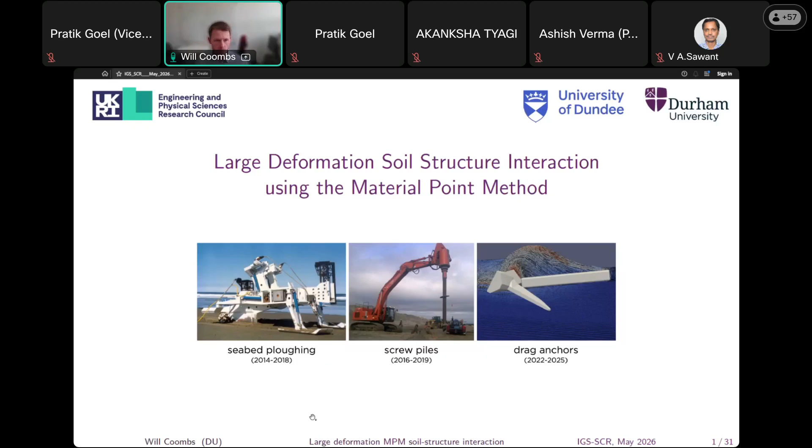Now, over these sort of 12 years, what that's allowed us to do is to be able to model quite interesting and challenging problems that involve a lot of different types of nonlinearity. So the sorts of things we now regularly simulate look like this - dragging of a shipping anchor into the seabed and modeling the full soil structure interaction process, large deformations, contact and friction, plasticity, etc.

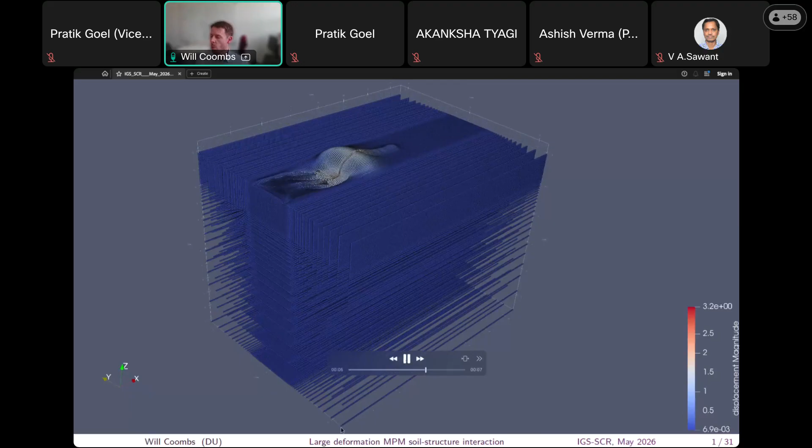But that's required us to really get into the fundamental details of the method and resolve a number of issues that were present in the method when we started looking at it. Initially, we thought we would be able to quickly pick up the method and just run simulations like this, and that turned out not to quite be the case. What I want to do today is mainly spend time talking about the fundamentals of the method and how you can resolve those difficulties rather than just showing lots of interesting and pretty videos of the results.

Oh, apologies, we'll skip back to the beginning.

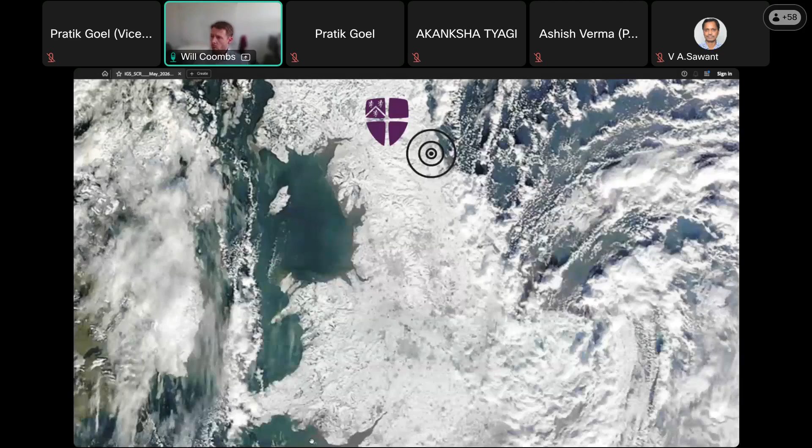Hopefully, there we are. Okay, so a little bit of an overview of the presentation. What I'll do first of all is just introduce the material point method. I'll then cover two particular issues that I think are really important to understand and to be able to overcome if you want to run realistic large simulations using the method. I'll talk a little bit about how we deal with soil structure interaction in the method, and then just show some numerical examples and conclude with a few observations on where things are.

Now, a lot of the basic developments that we've done in the method have been performed in a piece of open source software called Ample. This is something that I published alongside Professor Augarde about 6 years ago. This particular code is written in MATLAB, and it was designed to be as easy as possible to use by research students who wanted to start trying out things in the material point method.

We're also just about to release a Python version. So for those of you that are more familiar or happy with Python, that will be coming out this year as well. And so if you are interested in getting to grips with the method, this is, in my opinion, a reasonable place to start. A lot of the things I'm showing you can reproduce in this Ample software environment.

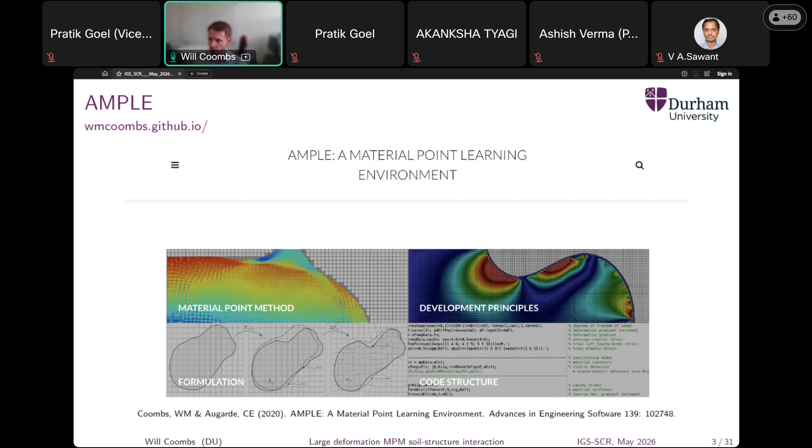Now let's get into the basics of the method. So how does the material point method actually work? I assume that most of you are familiar with the finite element method as the kind of default stress analysis tool that we use in engineering. The material point method shares a lot of similar aspects to the finite element method, and actually, the equations that we assemble and solve are essentially the same as you would do in a finite element method. But there are a couple of fundamental differences that means it has its own unique capabilities and challenges as a numerical tool.

So here, if we start off, the way that we represent our physical material in the material point method is through a collection of points, or material points, shown by the dark gray circles on this particular image. This is trying to represent a physical body that can deform, and that body's extent is shown by the gray shaded area, with the boundary as the black line.

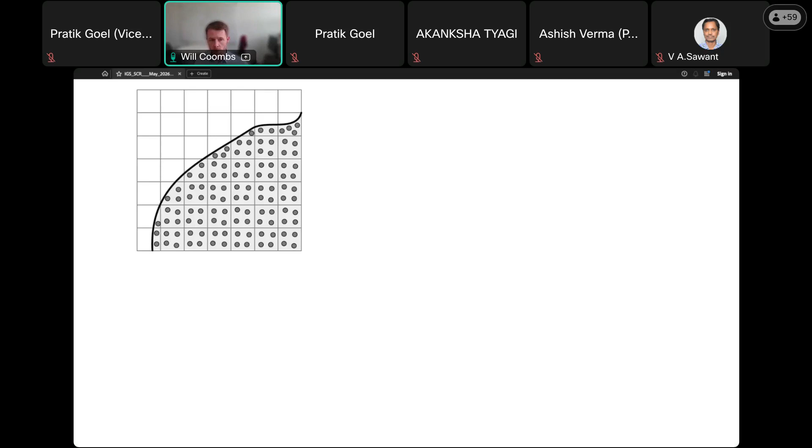Now, we also need a background mesh in the material point method, and this mesh is effectively a finite element grid. It's on this grid that we assemble and solve our governing equations. That can be the sorts of equations used for stress analysis, or this could be coupled soil water, or whatever set of equations - it could be thermal. We assemble them in the same way that we would on a finite element problem.

So what we would do is take the information we have about our material held at these material points, and map that information, such as the mass, the stiffness, the stresses, onto the background grid. And we use that information to assemble our governing equations.

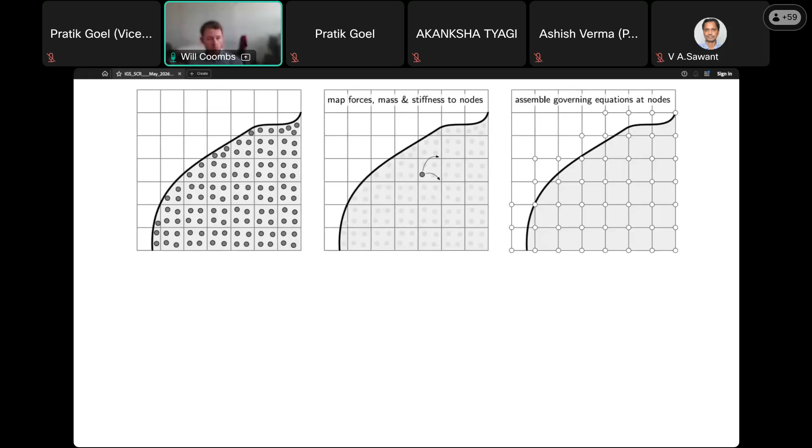We assemble those on the discrete locations in the background grid, like you would do in a finite element problem, and then we solve those governing equations. That leads to deformation of our nodes on our background grid and deformation of our mesh, and it also leads to deformation of the material we're representing.

Now what we then do is take that information we solved on the grid and map it back to our material points. We map and update the positions, the stress history, and any constitutive variables we're using, depending on the material model at those points.

And then the final step is we reset or completely replace the background grid, and then we just repeat this process. It's this final step of resetting or replacing the background grid which is the key thing that distinguishes it from the finite element method.

It's the key thing that allows us to model very, very large deformation problems with this numerical method, without getting into the issues that occur in the finite element method, such as mesh entanglement and mesh distortion, which would typically require you to remesh in your finite element program and then map information between meshes, such as material history.

The really nice thing about the material point method, particularly for geotechnical problems where we typically use relatively complicated constitutive models with a strong stress history, is that information is naturally maintained at the points as they deform through the mesh. However, there are issues caused by the fact we allow points to move through the mesh, and that's what I'm going to talk about a lot.

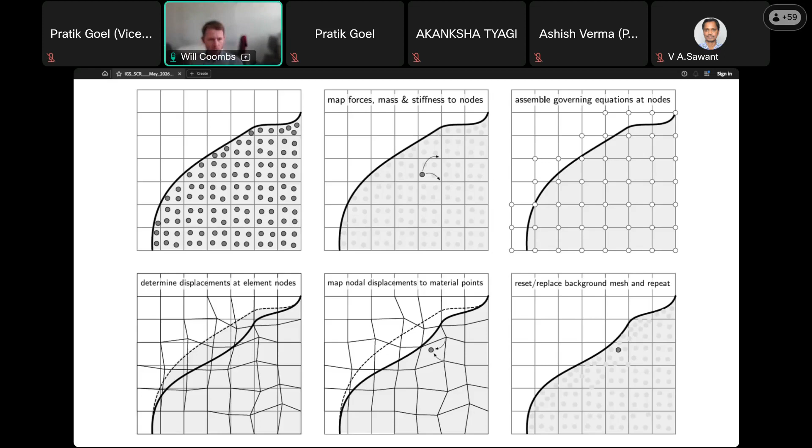So one way to describe the material point method is just the finite element method, where we allow the integration points, or the Gauss points, to move. That's essentially what we're doing.

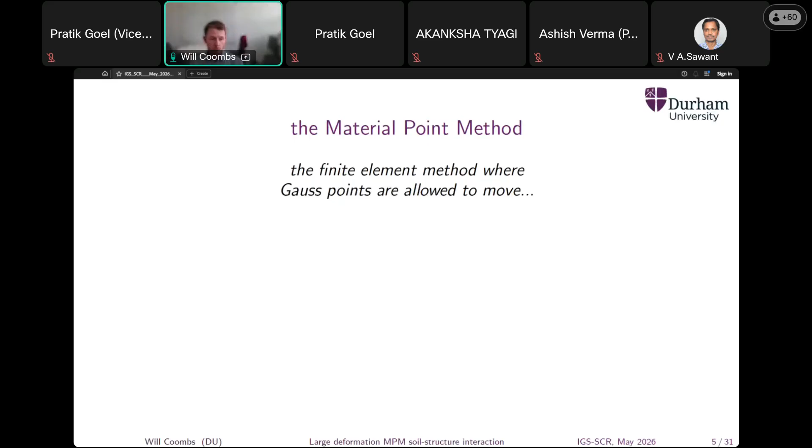However, that does introduce a number of issues, because there's a reason we carefully tie the finite element method integration points, or Gauss points, back to their parent elements. So I'm going to talk about two issues.

Now, the most widely known issue in the material point method is something called the cell crossing instability. This is what we would maybe call in the UK the elephant in the room for material point methods, and it's something you have to resolve if you're going to have any chance of doing reasonable simulations in the material point method.

But the other issue I want to talk about, which is less widely talked about, is this issue of small cuts, a small cut instability that is really severe in the material point method, which again we must deal with. Otherwise we're not going to have robust and accurate simulations, particularly not robust simulations.

So let's start with the cell crossing instability, and as I say, this is probably the most widely known issue in the material point method. What I'm going to do is take a step back and think about a very simple problem, a one-dimensional problem, shown at the bottom here.

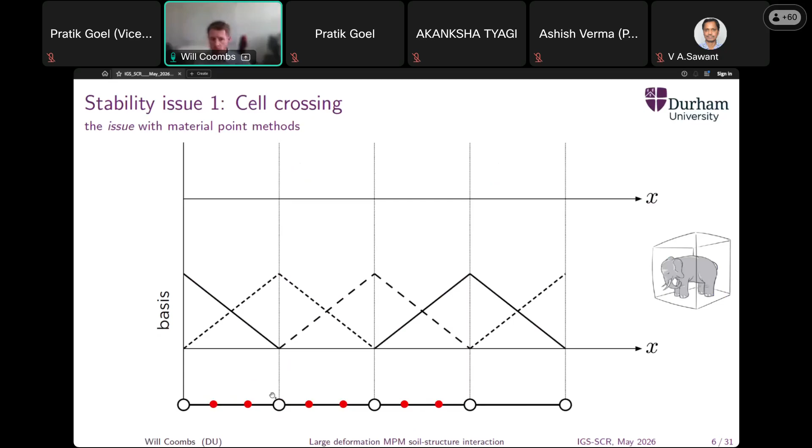We have a collection of material points representing a one-dimensional bar, for example — those are the red dots. We have a background grid, here just a grid of line elements, and the nodes of that background grid are shown by the white circles. We're going to apply a force to the end of that bar. Now we'll just use linear finite elements, so we can plot the shape functions, or basis functions, of those elements — you're perhaps familiar with these hat functions for linear finite elements.

As I said, we're going to apply a force at the end of this bar. Now also, when solving finite element type problems, we need the derivatives of these basis functions as well, and those are shown above. Because we have linear basis functions, their derivatives are going to be piecewise constant over each element.

So we apply some load at the end of this bar, and what we're going to do is consider what's going on at this grid node here, shown by this grey circle. We're only interested in the shape functions associated with that final node.

So they'll go to 1 at that node and 0 at the other nodes, and the derivatives of those basis functions as well. Now, in order to find equilibrium, what we do in finite element methods is have balance between the internal forces generated by the stress in our material with the externally applied loads. And the way we do that is we map information from the stress in our material to our grid node locations using the derivatives of the basis function and the volume associated with the particular point.

Same thing as in finite elements. In finite elements, we have a Jacobian and weighting information typically associated with our Gauss points, but that's just representing the physical volume associated with that particular point. So this has got to be balanced with the external forces.

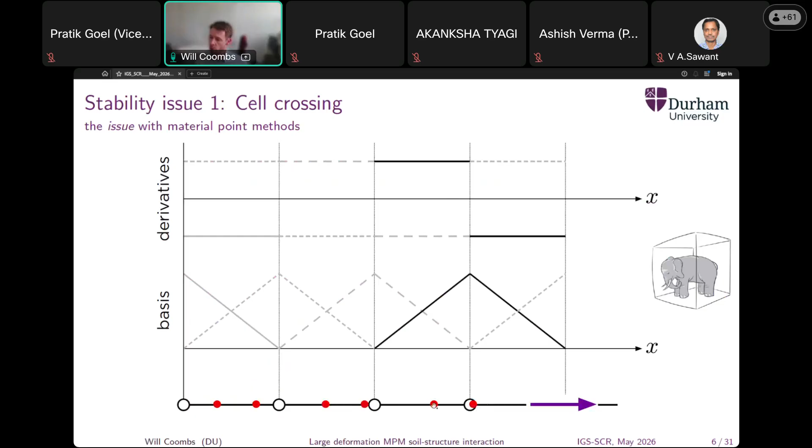Fine, we reach that balance and we have some deformation, but at some point that material point will cross from the element it was in originally into a new element. And when that happens, we get a sudden change in sign of our basis function derivatives. So that's this red part in here.

This is the spatial derivatives of our basis functions. And what this is going to do is cause a sudden change in sign of this internal force contribution from that material point. And it's this sudden change that causes the cell crossing instability, because now that force is no longer going to be in equilibrium with external loads, and we're going to have oscillations in our material deformation and stresses in order to find a new balance.

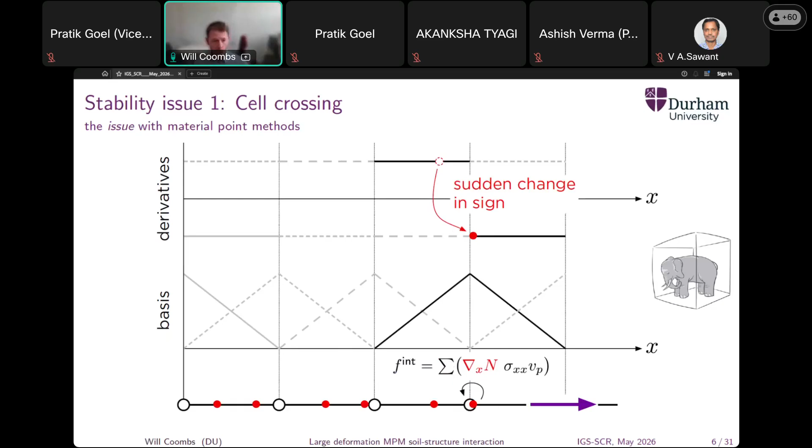And this kills accuracy in the standard material point method. So let's consider a really simple problem, probably one of the most basic benchmark problems we would do in the material point method. This is the elastic compaction of a column under self-weight.

So here, this is the problem that's been set up. We've got a column of material. The material points are shown by these white circles. We've got a background grid. We've got roller conditions on either side of the base, so this thing can only compress in one direction, only compress vertically, and we load it under gravity.

Now, this is a very simple problem where we have an analytical solution in terms of the stress based on initial vertical position in the column. And if you run this with the standard material point method compared to the analytical solution, you'll see something like this in terms of the stress response.

And you think, well, okay, it's a finite element-based method, so maybe I just need to refine my grid. So you refine your grid, and this is what happens. You have more points, more elements, and you just see more and more noise. That's because you're getting more and more of these cell crossing instabilities, which is just polluting your solution and completely destroying the validity of this very, very simple problem.

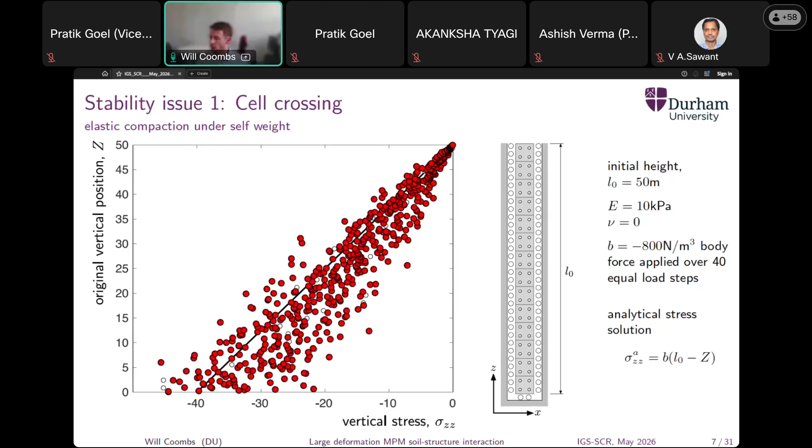Now, this was recognized a long time ago, and I'd say it's the major issue with the material point method. But there are lots of different ways this can be mitigated, and I'm just going to talk about the first way that this was really solved, and actually is the method we tend to use because it's, in our experience, one of the most robust and easy to use approaches to resolve this issue.

Now, this cell crossing instability really comes because we have a sudden change. As a material point moves from one element to the other, it's a big change in that contribution to the internal force within our system, and creates these large oscillations.

So back more than 20 years ago, Bardenhagen and Kober suggested a change where instead of having all the information about a material point at a discrete location, they said that what we're going to do is associate a domain, a certain area, with each of these points. And when it comes to things like the basis functions and their derivatives, we're going to average them over that area - we'll do a convolution of the basis functions over that area.

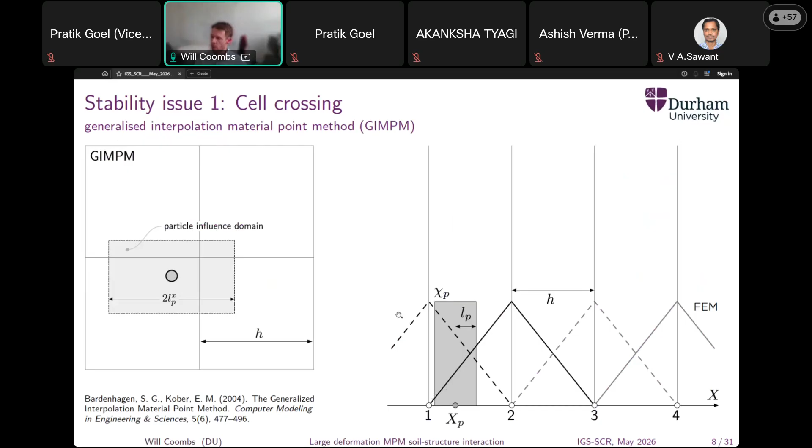So the consequence of this is basically what we do if we look at a one-dimensional plot of this. Here's our material point, and here's the area or length associated with that material point. These are our finite element basis functions, these hat functions. What we're going to do is integrate over that domain and average the basis functions, and that changes the basis functions we use from these finite element ones into something that looks like this, with a smooth transition between adjacent elements.

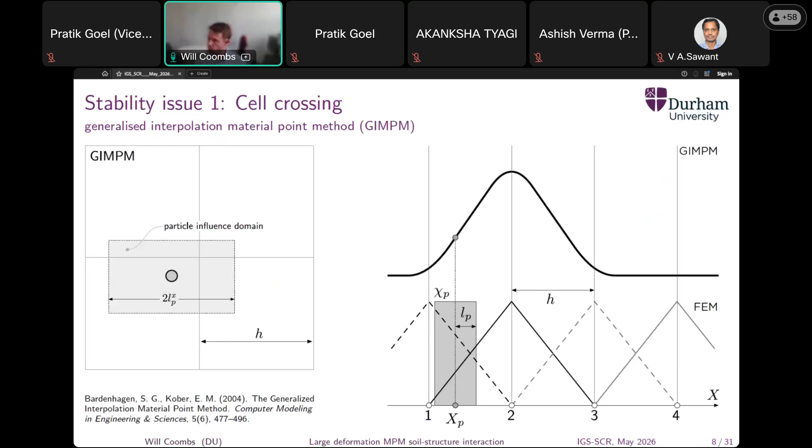So what that does, if we rerun this column problem with a relatively minor change, is that if we look at how our error reduces as we refine our problem, we suddenly now see convergence in our solution, because we've reduced these sudden instabilities in the method and smoothed out the solution by allowing a gradual transfer of information between elements rather than a sudden change.

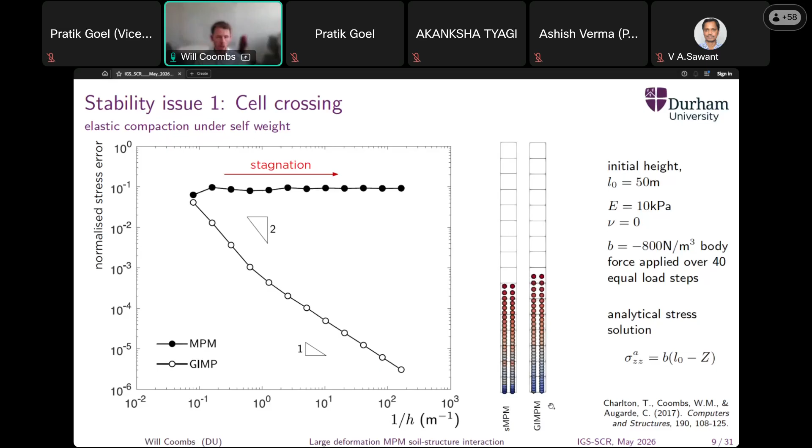And it's not just the stress solution that improves, which we can see here with the normalized stress error going down as we refine our background mesh and material points, but also the amount of deformation we're getting is different. This is the generalized interpolation material point method, or GIMP approach, versus the standard material point method. You can visibly see the stress oscillations in the standard method, whereas in GIMP these have basically completely disappeared.

So that's one of the issues, which I said was solved a long time ago, and this really transformed the accuracy of the method. There are lots of other ways you can deal with this - a very common approach is to use basis functions that have higher order continuity, such as B-splines, instead of standard linear finite element shape functions. That's also very successful at dealing with this cell crossing instability, and there are other approaches that have been developed over the years.

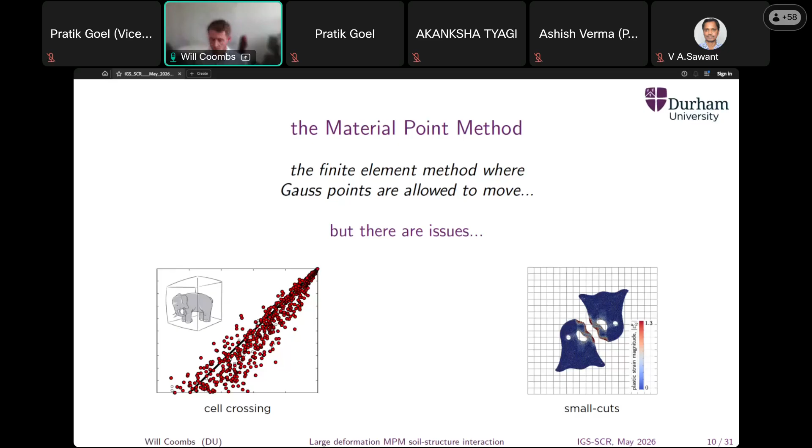Now, one of the other issues with the method that is not talked about very widely is this issue of small cuts. That's what I want to talk about next - what this is and how we can resolve this particular issue.

Now, for a long time, when we're using the material point method, what we would find is we would run a simulation and it would run with no problems. Then we would make a small change to the material properties, geometry, or loading of that problem and try to rerun it, and it would fail - it would fail at some point through the simulation. We couldn't really work out why. We would change the properties again and it might run, change it again slightly and it wouldn't run. So really, unstable behavior and uncertainty when you set off a simulation about whether it's actually going to complete or not - and that is a nightmare in terms of trying to use this method to solve any practical engineering problems.

Particularly as it was very difficult to predict how to avoid this in the first place. It didn't seem to be helped by having a finer background grid. It didn't seem to be helped by having more material points. It almost seemed completely random.

And what we then did is we started to look into more details about why these simulations were failing. Here what I'll show in a moment is just a video of a very simple problem - this is a two-dimensional analysis of an elastoplastic block under gravity, and basically what we see is this block slumping and collapsing. It's a von Mises type material.

Associated flow, very simple constitutive model here. What I'll do on the video is show the material point deformation, colored according to the shear stresses. You'll also see vectors of the displacement calculated on the background grid at each step through the simulation. And what we see is something a little bit like this.

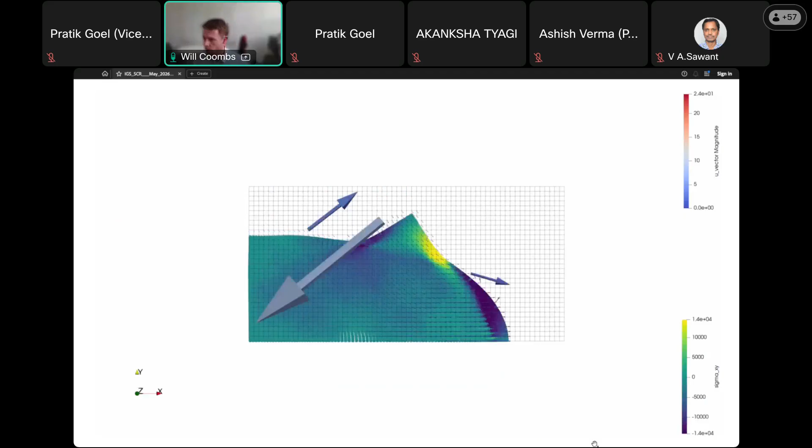So it runs, it collapses, but let's run that again. What you see at certain points, quite often through the simulation, are these very, very large values of displacement on your background grid. Now, I have not scaled at all the displacement vectors here. These are the true magnitudes of the displacements being predicted on the background grid.

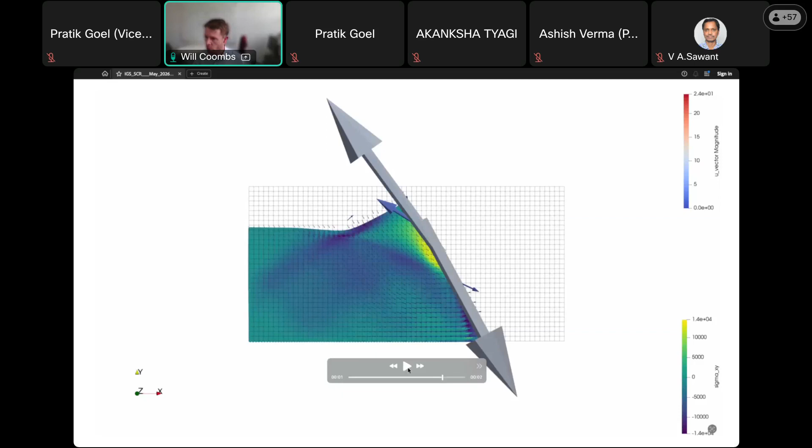You can see that some of them look entirely reasonable, quite small, so maybe tricky to see in terms of how the material is deforming. But others are completely spurious. You would not expect your material to be deforming upwards under this gravitational loading, and others are just huge, like this final one here — a massive displacement being predicted on the grid, not at the material points, but on the grid. But bear in mind, we use this grid information to then map back to the points to get our overall solution.

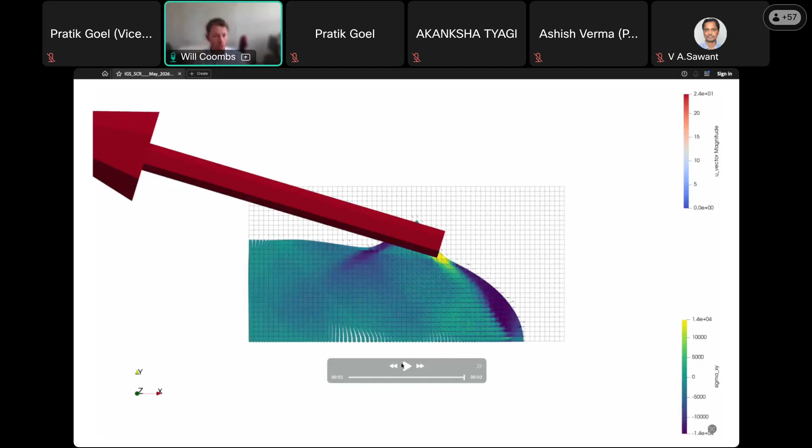It's these large displacements, and they typically, if we watch again, occur at the boundary of our problem. If you look where they're starting from, those arrows are causing these simulations to fail. Because what can happen is those very large values of displacement can then be mapped to the material points. They can then displace sometimes in a very unusual way, and that can cause the whole simulation to break down and fail.

So how do we get around this? Well, first of all, we were trying to really understand the issue in the first place. So we set up, again, a very simple benchmark type problem to understand what was going on.

This is a two-dimensional problem where we have a block of material. We constrain the base of that material by a roller condition, and then we pin one point so that we actually have a valid system to solve. And what we did was just move that material through the background grid. We're not actually solving a problem, we're just translating this material.

Then we investigated things like, what does the stiffness matrix look like that we're solving? What does the mass matrix look like, to try to understand why we're seeing these instabilities close to the boundary of the problem we were solving? So what do we see? The amount we're displacing is this value A, and the grid spacing is this value H. That's pretty consistent across all of the diagrams in this presentation. So what do we see?

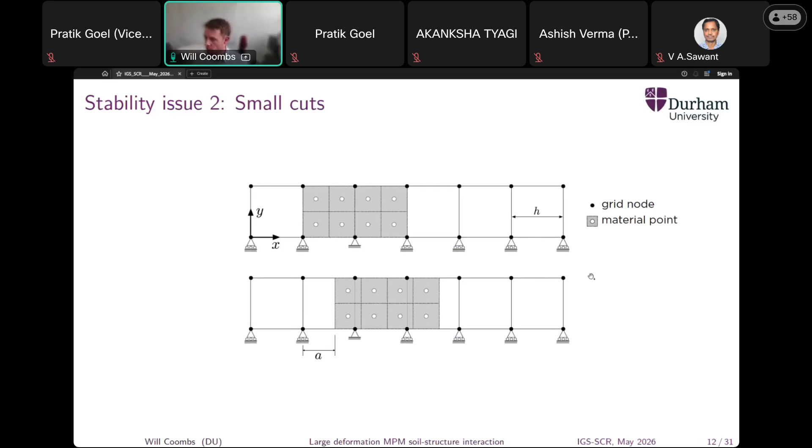For the stiffness matrix, we plotted something called the condition number. Many of you may be familiar with conditioning of linear systems, but if not, the condition number of a matrix is a measure of the ratio of the largest to smallest eigenvalues of your matrix, or some measure of the spread of the magnitude of the numbers within that matrix. Large numbers are very problematic because you start to run into issues of accuracy when you solve your linear system. The stiffness matrix is used to solve for displacements of our problem, and if you have a very large condition number, you basically run into problems of accuracy in your solver.

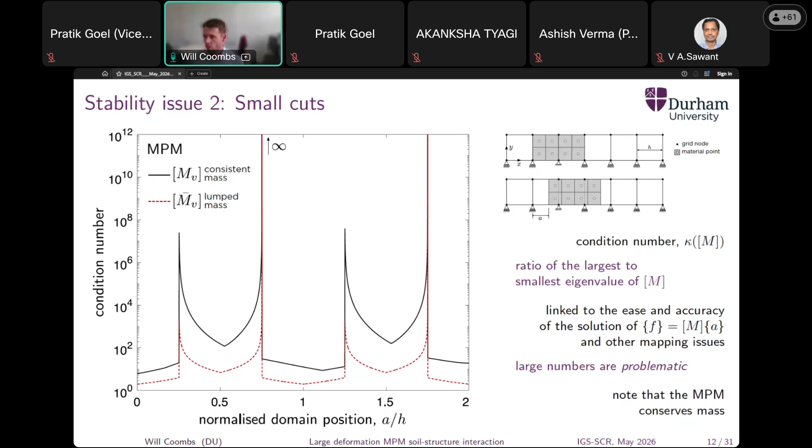Now, the consequence of that, particularly for explicit analysis, is it really impacts something called the CFL number. The CFL number is widely used across numerical analysis, particularly in explicit methods, and it's basically a measure of how small a time step you need to take through your simulation in order to remain stable. It's not strictly applicable to the methods we use because we tend to solve things using implicit methods, but it still provides a guide on how small a step you can take.

Now, we weren't the first to realize this was a problem. I think we were one of the first to resolve this generally for the material point method. This was actually mentioned by Sulsky, one of the originators of the material point method, way back in 1995, so 30 years ago. They proposed an approach called modified update stress last, which works for explicit methods to a degree. There have been other approaches, like redistributing these very small entries to other parts of the system, which can be done with explicit approaches. There's also been some ideas of introducing a very soft stiffness to the background grid for implicit methods, but in my experience this doesn't really work.

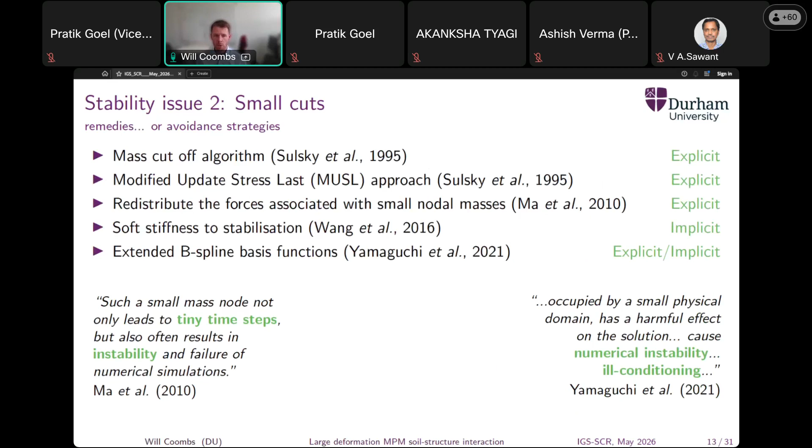This has been dealt with quite effectively for B-spline basis functions by the work of Yamaguchi in 2021, and they all talk about the same thing really. Sulsky talked about the fact that you can get very small values of your basis functions, whereas the internal forces are not necessarily small, and this can cause unphysical results. If you look at more recent papers, they talk about the need for tiny time steps because of instabilities, and Yamaguchi talks about this numerical instability due to ill conditioning. It's this ill conditioning, or loss of coercivity, which is the major issue really being combated here.

So this is just Sulsky's statement in a bit more detail. Now, when we really realized that this was the issue through various investigations that we did, we started to look at other numerical methods that also face this issue.

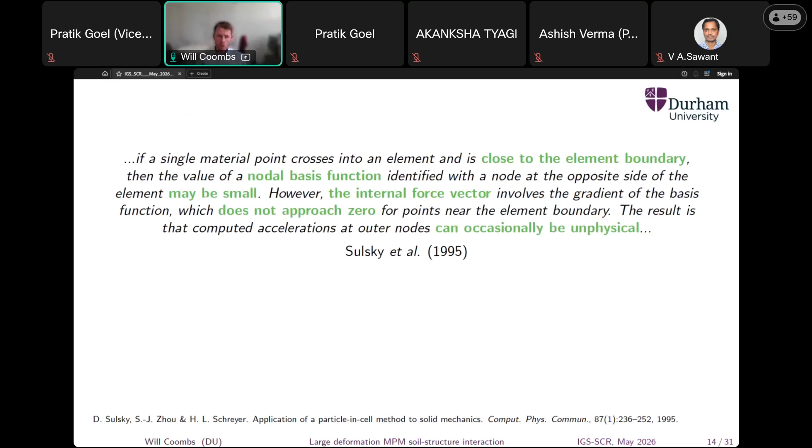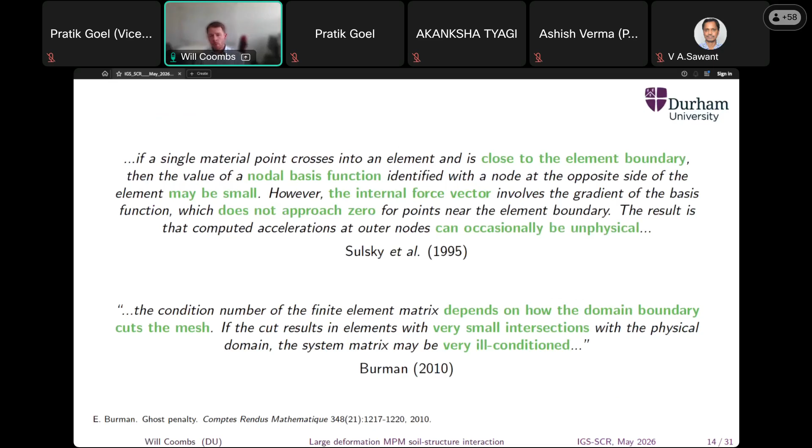Another class of numerical methods that suffer from this small cut instability are a class of methods called unfitted, or cut, or immersed finite element methods. They have a range of techniques to deal with exactly this issue in their particular method. In particular, the work of Burman from more than 15 years ago talks about exactly the same issues and ways this can be mitigated to restore the conditioning of the linear system of equations you're solving. The particular way we adopted to deal with this is something called ghost stabilization, which comes from the immersed finite element community.

So again, let's go back to that diagrammatic sketch I had at the beginning of this talk, where I was showing the material we're trying to analyze, the physical boundary, and the background grid. In immersed finite element methods, this is also basically how they solve their problems. You have a description of the boundary, you have full finite elements, and then you have cut finite elements, which need to be discretized in a different way. Then you solve your problem, and it can evolve, and you keep doing it.

It's very similar to the material point method in a lot of ways. So what happens in immersed finite elements? How do they resolve this issue?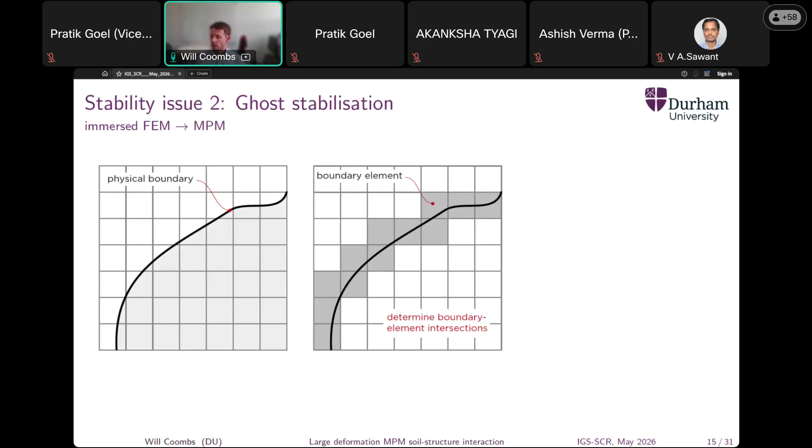What they do is identify the elements that are intersected by the boundary, because it's these elements at the boundary that are causing all the problems. These are the ones that are going to have the small cuts, the small contributions to the mass and stiffness. You determine those intersections, and then you introduce a stabilization.

Now, this equation looks horrible at the bottom, and it's not nice at all, so I'll just talk more physically about what's going on. What you do at these intersections, on these boundary element edges, is introduce an additional stiffness term that tries to enforce continuity of the gradient of your solution across those faces. This restores coercivity back to your linear system, because you couple those poorly conditioned elements, the ones near the boundary, back to well-behaved elements inside your physical body.

So we had to look at how do we adapt this to the material point method. The biggest barrier is that in the material point method, you don't normally have a description of your physical boundary, you just have a collection of points. We don't actually track the boundary normally in the material point analysis, so we need a different way to identify where we should apply the stabilization.

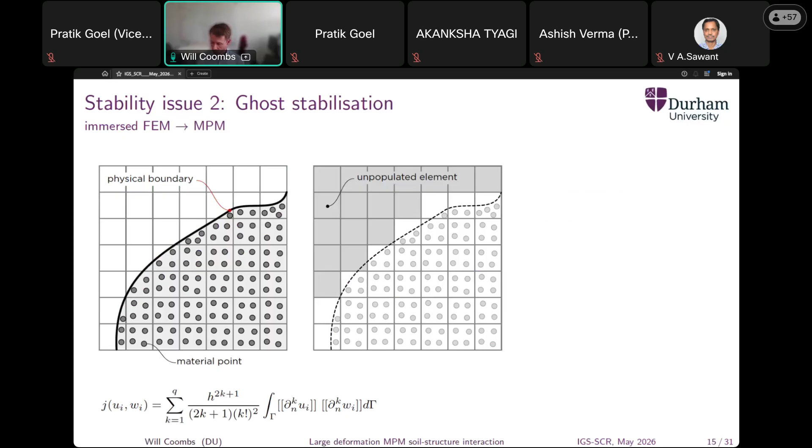The way we approach this is we identify which elements don't have material points in them. We call those the unpopulated elements. The boundary between these unpopulated elements and the other elements is where we need to stabilize. So we don't need to worry about the unpopulated elements, they don't take part in the analysis. We just stabilize the elements at the edge of this populated region, the area where we have material points, and apply the same stabilization technique to the boundary element edges in order to enforce continuity of our solution.

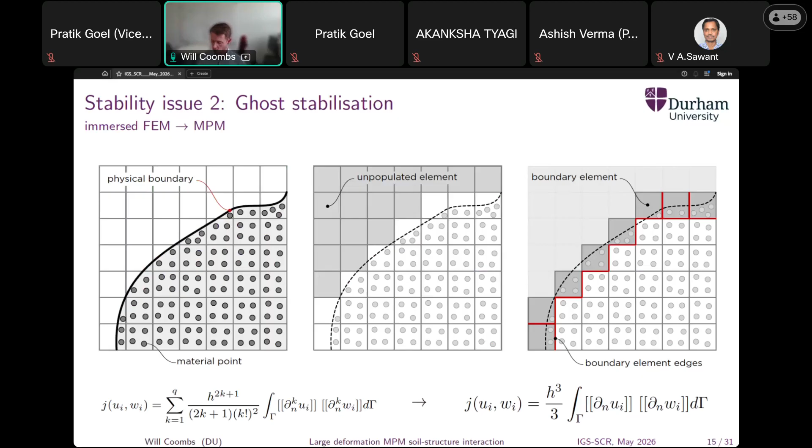So this goes into it in a little bit more detail. What we have to do is, over each of these boundary element edges, perform an integration, which we can do using standard Gauss quadrature. It turns out to be a much easier calculation because we're just using linear basis functions, and this generates an additional stiffness matrix, which we add to our linear system.

Now it does introduce a penalty parameter, but there's well-documented literature from the cut or immersed finite element community on how we can link this penalty parameter back to the stiffness of the material we're analyzing, or the stiffness of the material points within the elements we're considering.

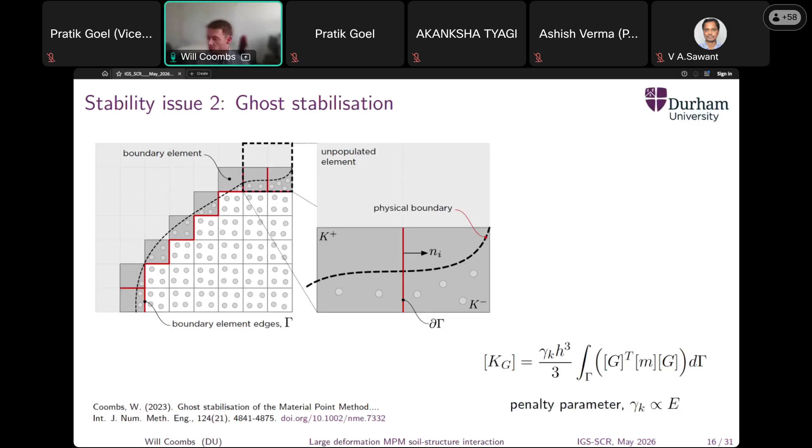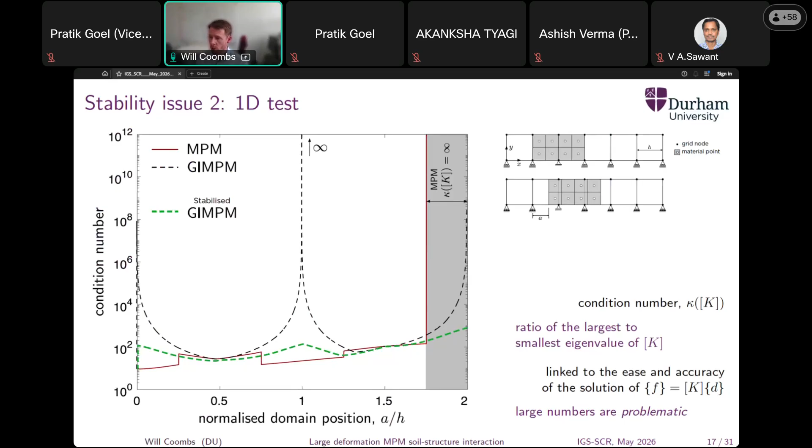So what does this do? If we go back to this 1D test problem and look at reanalyzing this, this is the result we saw before for the conditioning of the stiffness matrix. If we apply this stabilization, we basically see that we don't have these problems at all with the generalized interpolation material point method, we restore good conditioning across where it's reasonable.

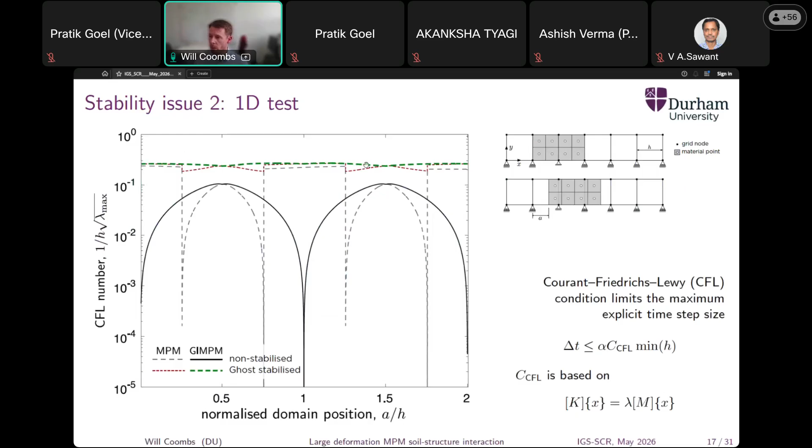If we then also look at the CFL condition, the thing that limits the smallest, or maximum, time step we can take, we see that if we stabilize the analysis, we basically have a near constant CFL number across this full displacement of the material.

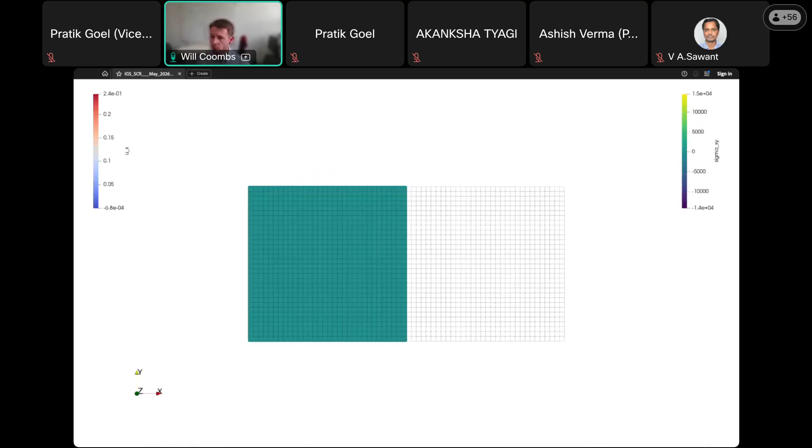So let's go back to the problem that motivated this investigation to begin with, the collapse of this block. If we apply the stabilization and rerun things, we see something much more physical. In this case I've scaled up, doubled the size of these arrows, but we've completely lost those spurious, unphysical, large displacements we were seeing without the stabilization.

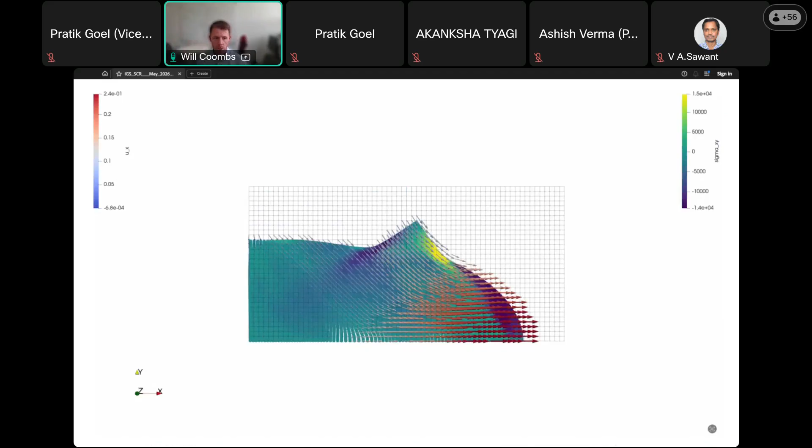If we do a comparison of one particular step, we've gone from something where, in the same load step, we were seeing something like this without the stabilization, to something like this with the stabilization. This has completely transformed the robustness and stability of all the material point methods that we use.

And it means that we can now set off a simulation that might last a couple of weeks for some of these very large deformation simulations that we run, and just know that we can come back in a week or two weeks and we'll have our result. We don't have to constantly be checking to see if things have failed.

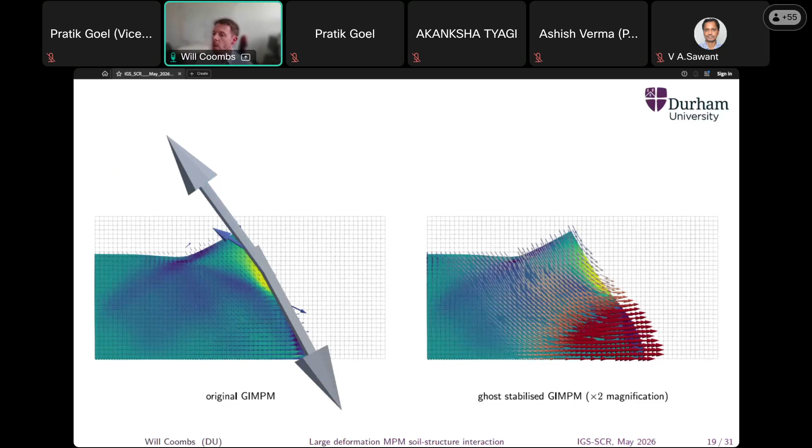Okay, so a little bit about soil structure interaction, and then we'll go on to some examples. This bit's much quicker, the second half, than the first half. So how do we deal with soil structure interaction in the material point method?

One of the nice things about the material point method is it automatically includes no slip, self, and multi-body contact. So we don't have to worry about internal contacts or material coming back together. That's all handled automatically because you're doing your calculations on a common background mesh. However, this does cause other problems.

If we actually want to model the interaction of, for example, soil with a structure, then we need to do this in a different way. You don't have a very accurate representation of your contact surfaces because, as I said before, we typically don't track the outer boundary of our physical body. So you need a different way to track and enforce the contact.

Now, the approach that we take is we assume that when we're doing soil structure interaction problems, the structure is basically a rigid body. And we use the geometry of that rigid body as the contact surface. It's on this contact surface that we enforce our contact conditions.

We choose to use a penalty formulation for the contact conditions, but you could do this with a Lagrange multiplier or augmented Lagrangian or Nitsche method, whatever particular flavor of contact constraint you want to impose in your simulation.

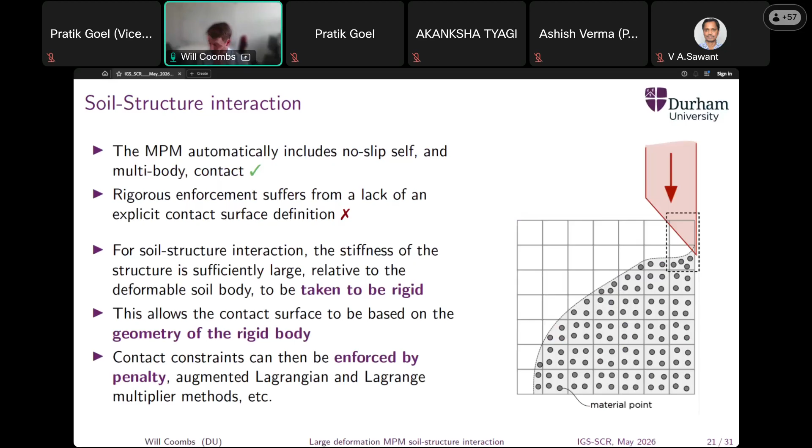If we combine this with generalized interpolation material point domains, and if we've got some structure coming into contact with our material, we have a number of steps to solve this. So we use the corners of our domains associated with our material points to detect contact.

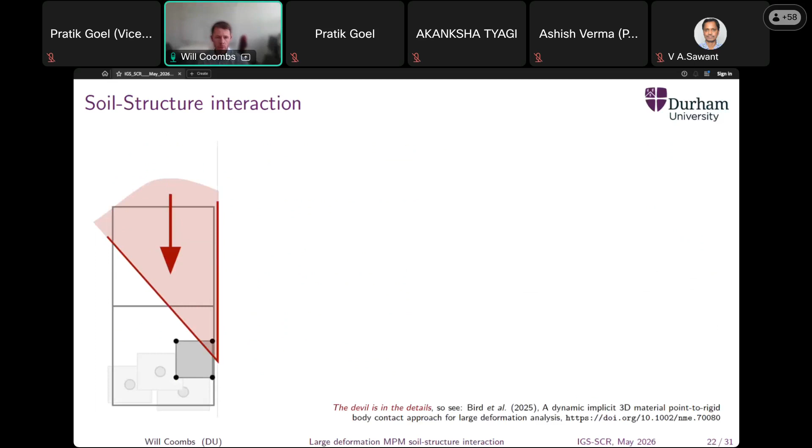If we detect a contact, we then have a penalty spring that basically enforces our contact conditions. This also has a frictional element as well coming in here, so there's friction between the rigid body and the soil. We find equilibrium between the rigid body and the material points, so we assemble force equilibrium between our bodies as well.

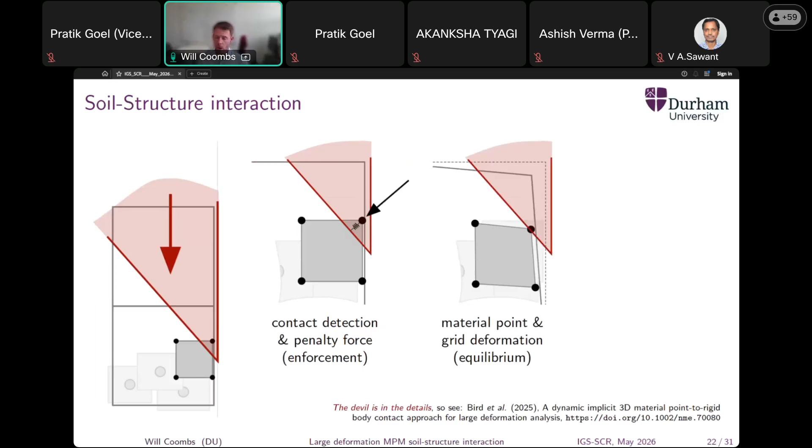And then finally, we do an energy consistent update on our material deformation to make sure things remain stable, because you can see here that initially we get some deformation in our domains, but the way that generalized interpolation material point methods are posed, they always have to be rectangles or cuboids, the shapes of the domains. So we do an update that's energy consistent to reinforce this particular shape.

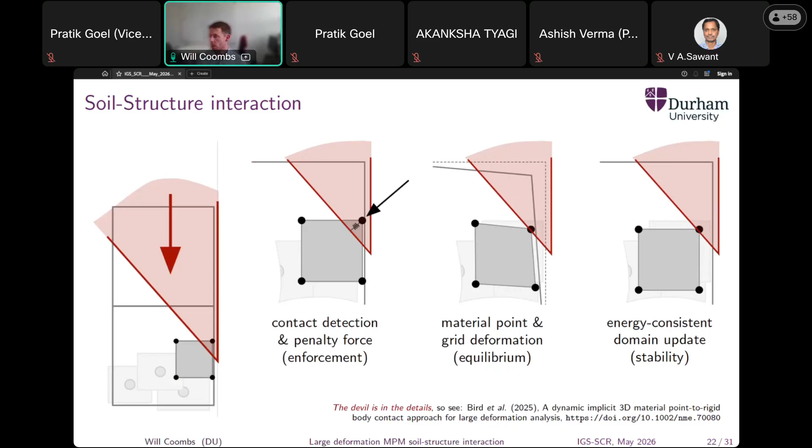So I'll just cover some of the basics on that, but I'm happy to answer any questions, or you can check out papers on that if you want more details. So let's look at a couple of examples.

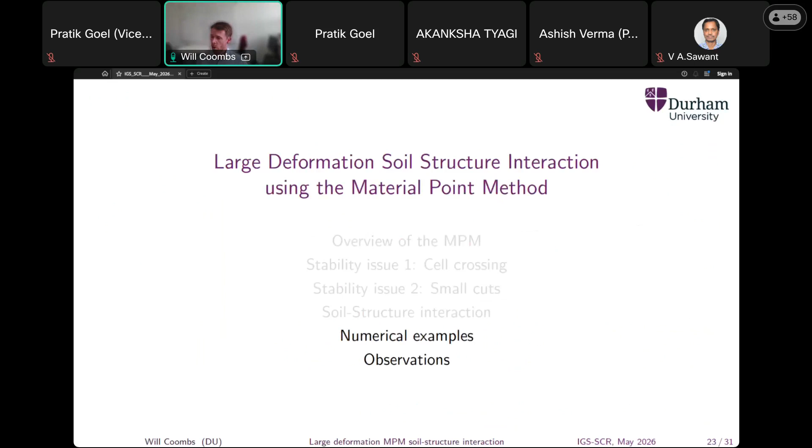I'll start off with a cone penetration test as a very routine site investigation technique that's done particularly offshore. If we're thinking about cabling routes or other foundation sites, then a cone penetration test is one of the most common things that's done offshore. Basically, what happens is you take a conical tipped probe and push it into the seabed and measure the end tip resistance and also the frictional resistance on the sleeve as it's pushed in.

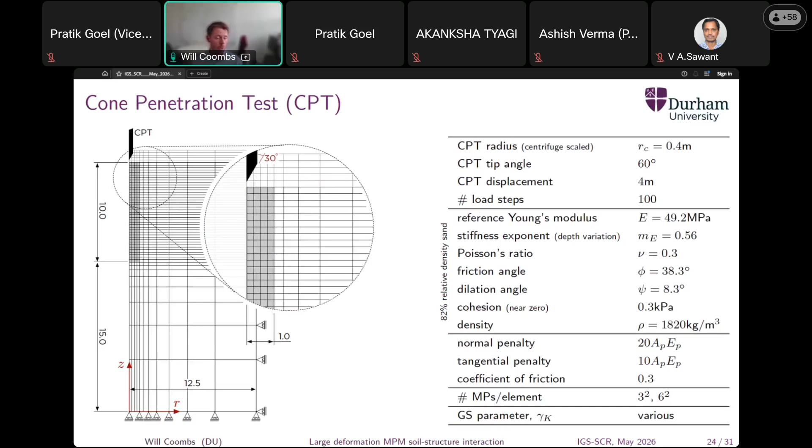Here you've just got the various different parameters that are used in a single simulation. We do this as an axisymmetric two-dimensional analysis because we have 360 degrees rotational symmetry, so we don't need to do a 3D analysis for this particular case.

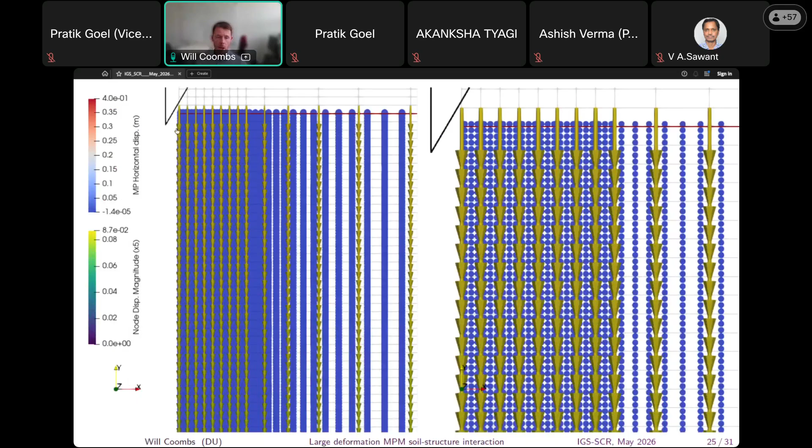What does that look like in terms of analysis? Well, material points are shown by the colored circles in terms of their horizontal displacement, and the arrows are showing the grid displacements. You can just see the tip of the CPT coming in here. We deliberately extend it beyond the boundary, the center line, which is the edge of the mesh, so that we don't get any strange artifacts at that corner.

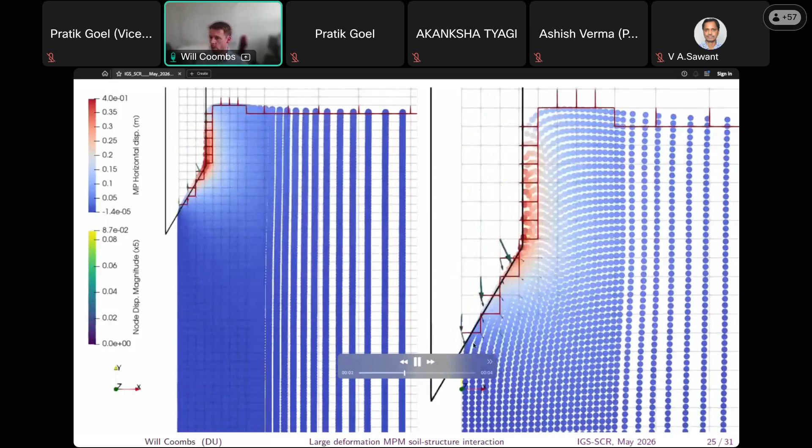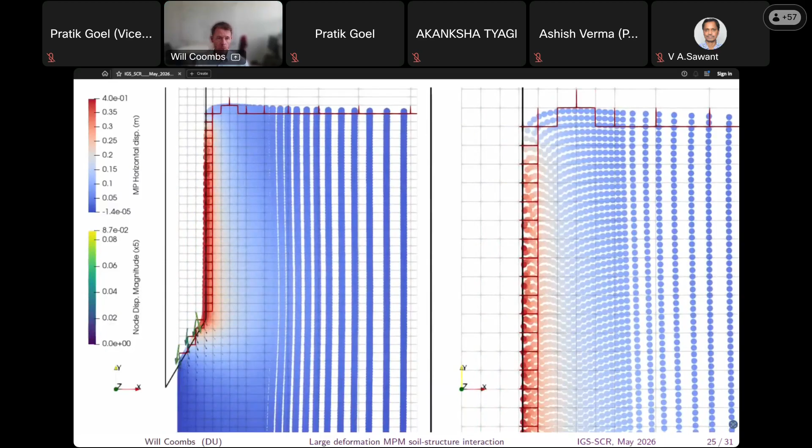And the simulation looks something like this. This is a zoom in on the right-hand side and the full picture on the left-hand side. You can see that we do sometimes get relatively large displacements on the grid, but these are entirely physical based on this tip being pushed into the seabed. This all runs, this is like 10 minutes on my laptop, very quick simulations really. Now, do they represent reality?

We can also improve our model slightly by fitting to these results if we want to analyze a more complicated problem. So normally we would tune our parameters, or tune our relative density slightly, to get a good fit to experimental results. Here we now have 4 different relative density sands, and then we use these material properties to predict other things where we don't have a known result.

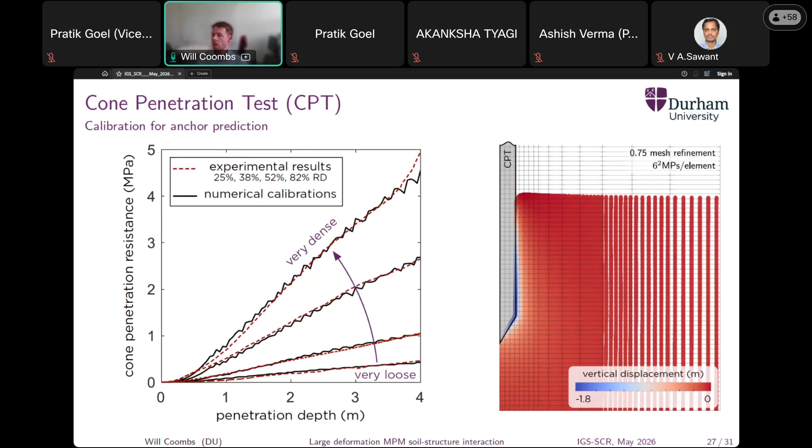We could use these, for example, to predict an anchor penetration into the seabed. So the next example takes those same material properties but runs analyses looking at different anchor geometries and seeing how they behave in this particular seabed condition.

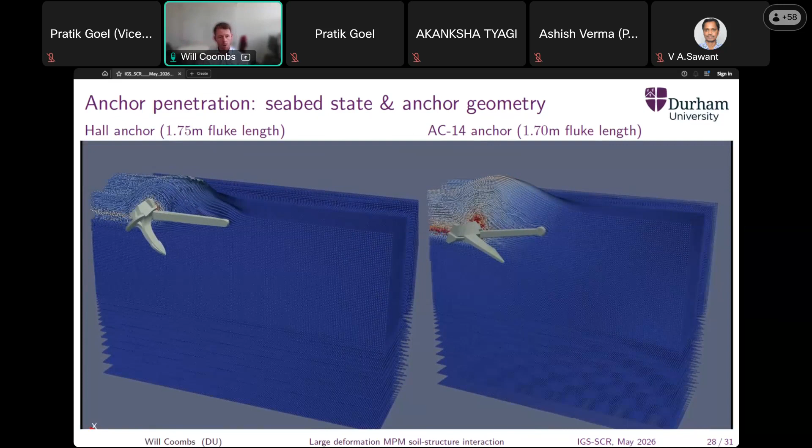Here is a more typical analysis we might do. We have a Hall anchor and an AC14 anchor, two of the most common anchors used in the shipping industry. They're very similar in terms of size and mass, but because of differences in geometry, they have very different penetration depths in this loose sand condition. We see much more penetration from the AC14 anchor versus the Hall anchor.

We're doing this particular analysis because anchors are the most onerous threat to buried subsea infrastructure, such as cables. So what we need to try to do is understand how deep different anchors will penetrate into the seabed under different ground conditions.

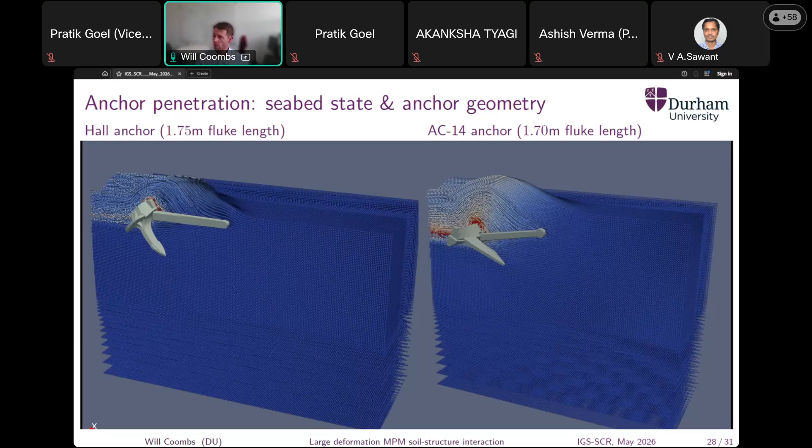We can repeat this analysis in different ground conditions. These are results for a Hall anchor, one of the most common anchors used in the shipping industry. We've got penetration depth and drag distance normalized by the length of the fluke, the pointy part of the anchor. Here are our validations against geotechnical testing at the University of Dundee centrifuge for different relative density sands, from very loose to very dense.

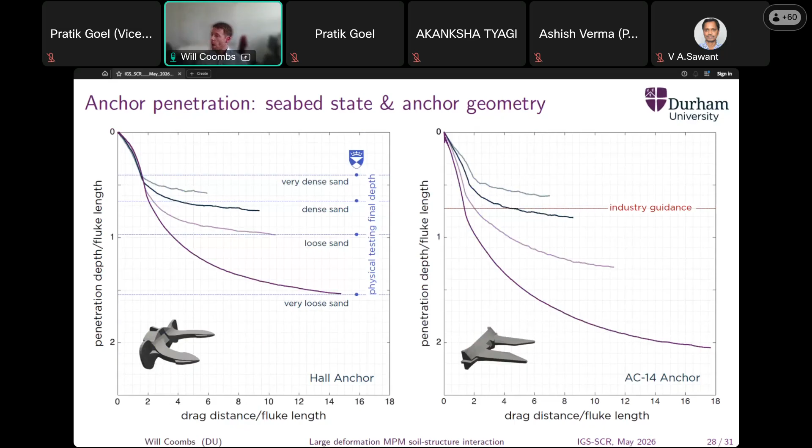As I said, we can do this for different anchors. These are the same ground conditions but for the AC14 anchor. Although I'm not going into detail here, since it wasn't the focus of the presentation, I think it's worth highlighting that industry guidance suggests all of these anchors should have the same amount of penetration based on their fluke length, shown by this red line.

What we're doing in this research is providing much more detailed guidance on how deep different types of anchors will go in different seabed conditions, such that we get more robust advice for industry on how deep we need to bury cables to protect them in different ground conditions.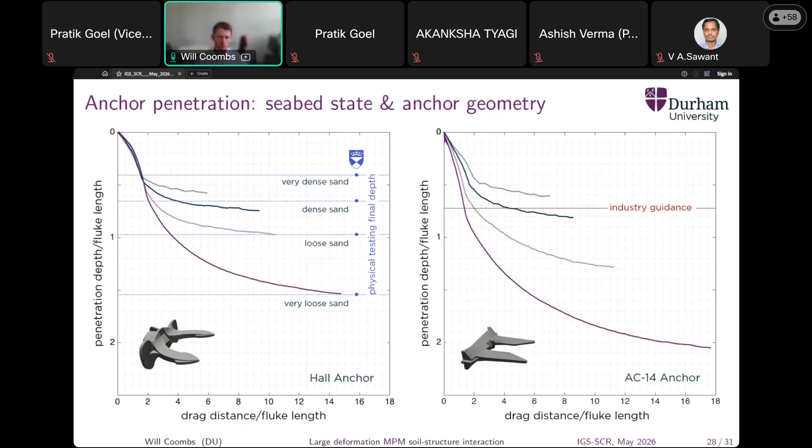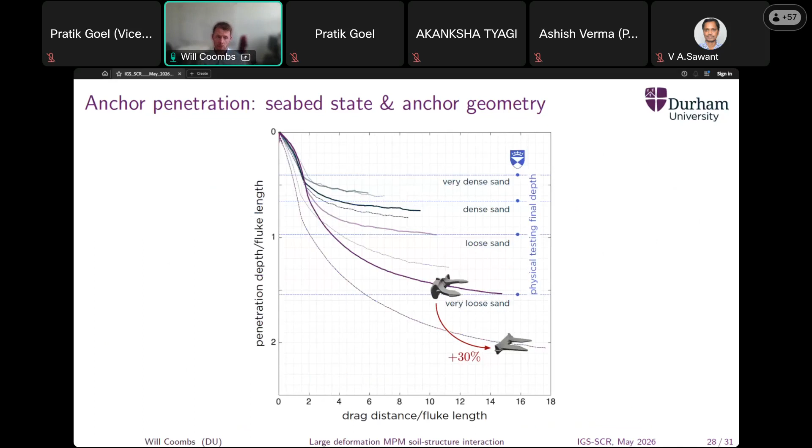One thing to highlight is that just by changing the anchor type, the shape, we can see a 30% increase in the amount of penetration. The only reason this is possible is because we've developed this robust simulation framework to test out different geometries and directly compare against validated, robust results that we're confident in.

Okay, I'll finish there. Just to close on a few observations: it's been more than 30 years since the material point method was first developed. We still often describe it as a new method, but at some point we have to decide to stop calling it new. Maybe 30 years is enough.

A lot of people describe the material point method as a meshless method, and I think that's not helpful personally. I think it's much better to describe it as an unfitted mesh-based method, because it actually has a lot of the same characteristics and issues that immersed finite element methods or cut finite elements have. It can be really helpful to look at that literature when understanding what you're seeing in a material point analysis, and maybe why you're having issues.

We've got to deal with the instabilities in this method, particularly as geotechnical engineers, because we do like to use constitutive models that have a strong history dependence.

But if you don't get rid of the instabilities, these instabilities in the stress history can lead to completely spurious material behavior. If you suddenly have spikes in your strain or stress history in your constitutive model, you can just erase the history of your material and get spurious results back.

Now, there are still lots of challenges. I've shown some things that have been fixed, but 3D large deformation coupled soil-water simulations are still really difficult and challenging, particularly in terms of simulation runtimes. There are scientific issues too, related to the fact it's a very stiff system, which leads to very long runtimes. And boundaries in the method still need more work.

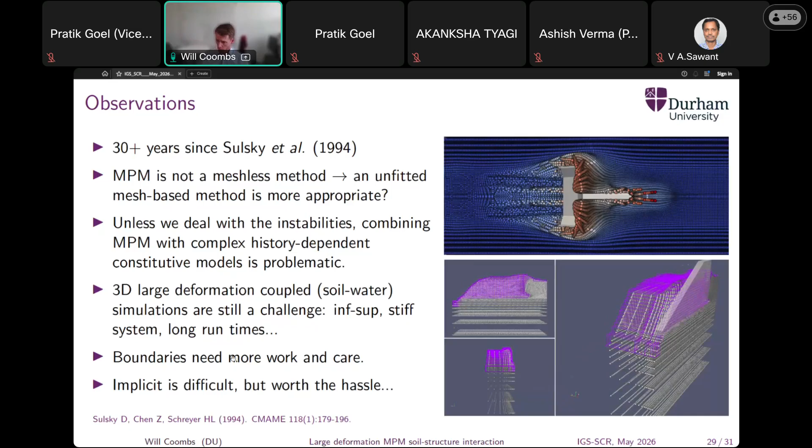So thank you for the opportunity. Obviously I gave the talk, but really this is the hard work of a lot of different people over the years, from Tim Charlton, who was my first PhD student on the material point method, to Yun Bing, who worked on boundaries.

Michael Cortis looked at seabed plowing, Joseph looked at B-spline methods and other things, Lei Wang was looking at screw piles, Giuliano Preti, who's now at Toronto, has done a lot of our coupled soil-water analysis work. Nathan Gavin was using this to look at the heart. Ted was looking at higher order continuum theories, Cosserat theories for discrete shear bands. Bradley did some early work on implicit and explicit techniques. Robert's really the person that's implemented our current code, and Sam is working on glacier simulations using the MPM.

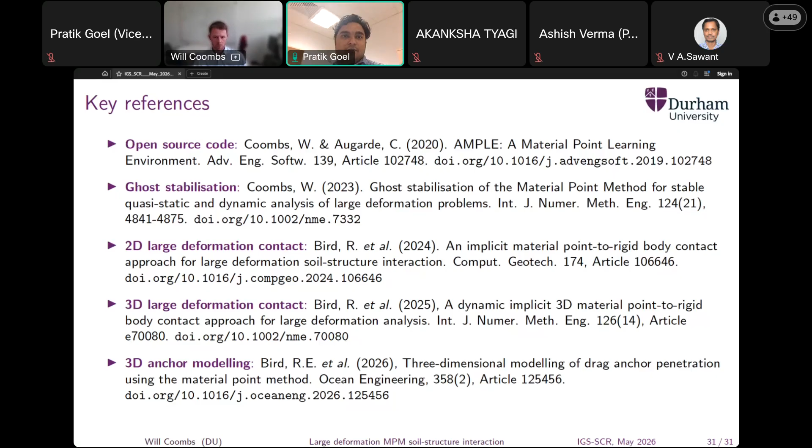Okay, so it was an excellent lecture, and so much to learn. I really appreciate the efforts made by Professor Coombs to make it more understandable to people who are new to this field, and the questions here were also really put on well. Even I also wanted to know what is the difference between DEM and MPM, so thanks, Purushottam, for asking this question. And thanks, Professor Coombs, for handling the question answer session so well. So it was a really good lecture followed by interaction session. Congratulations and thank you very much.